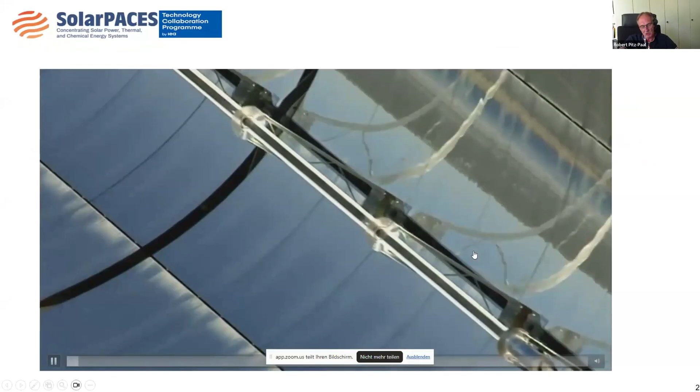Okay, thank you very much. And I also try to share my screen. Together with my colleague Benedikt Kölsch, I have actually the pleasure to chair this year's conference, the SolarPACES conference taking place in Bad Neuenahr. And it's actually the 32nd edition of this conference. And before I go into some of the details, let me make sure that you're all aware of concentrating solar technology. So this is a very brief animation video that shows you the principle.

When you concentrate sunlight, in this case on a parabolic trough collector, you are able to achieve very high temperatures, in this case like 400 degrees centigrade. This energy can be used, for example, to generate steam, and this steam can then be used on the one hand side for process heat application, but also, as shown in this video here, for the generation of electricity.

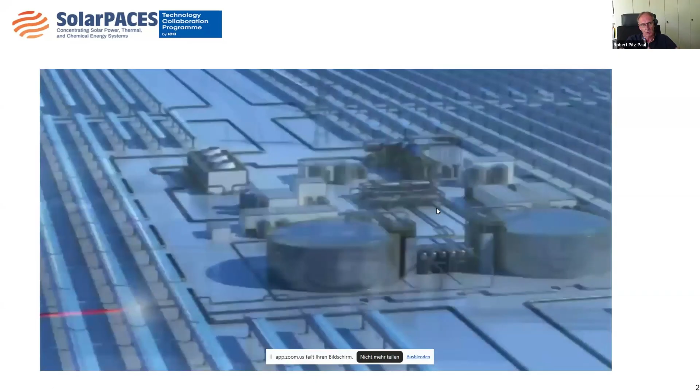This is actually a large scale application, so you typically do it in many megawatts. And one nice thing is also the energy can be stored as thermal energy very effectively and easily, typically in a molten salt, and can then be used to continue the operation during nighttime or during periods with clouds.

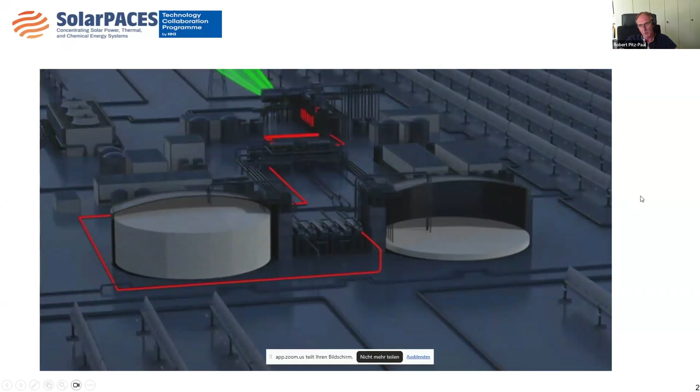So just to make sure we are all talking about the same topic and you are aware, SolarPACES is the implementing agreement, the technology collaboration program that is actually working on this kind of technology. So our vision is, of course, linked to this concentrating solar technology. We want that this becomes an option to significantly deliver clean, sustainable energy worldwide.

And as an international association, our mission is to facilitate the technology development, the market deployment, and energy partnerships by providing leadership as an international network of independent experts.

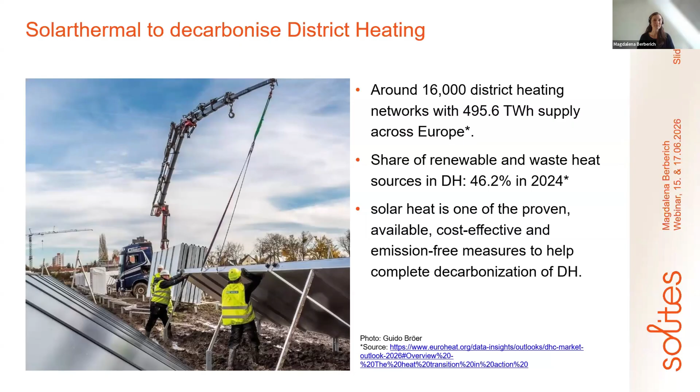Now the share of renewables and waste heat in 2024 was 46% already. And of course, we need to go further here. And solar heat can be one part of the solution. It's one of the proven technologies. It's available everywhere, cost effective and emission free. And so we are very convinced that it can play an active role here in the decarbonization of district heating.

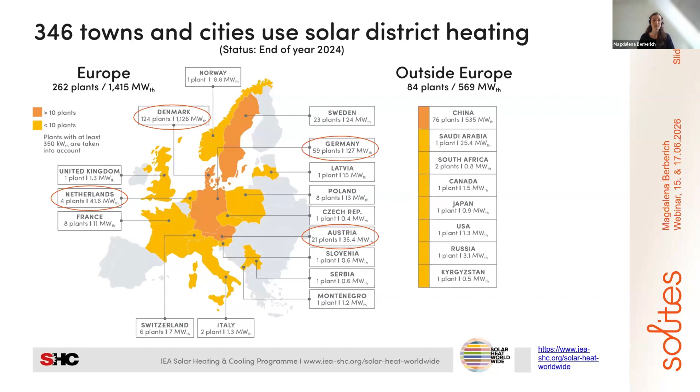And the good news is around Europe, there are a lot of towns and cities already using solar district heating. Here, for example, in Denmark, there's a large share of solar district heating. In the Netherlands, in Germany, and in Austria. These are the markets with the highest numbers of plants or installed capacity. And there are newcomers. There are other countries also installing new plants. So there's a lot of development here.

We take a deeper look into Germany. There we also have a lot of installed plants, now 241,000 square meters and 159 megawatts installed in 71 systems. These are numbers from end of 2025, so there may be some changes now. In 2025, we had 10 new systems. There's good development, especially last year. There were a lot of square meters newly installed.

And we know from the market that there are ongoing realizations. So plants that are in a very concrete planning phase, so that they will be commissioned or installed in the next months or years. And here it's also 10 systems with 132,000 square meters. So we know that the plants get bigger, so more collector area, more square meters are installed per plant, and the plants are very different.

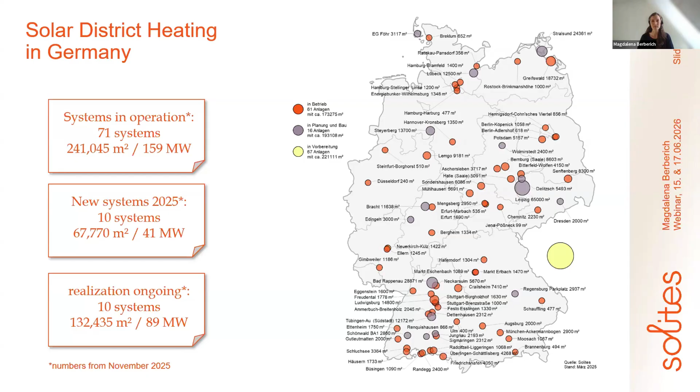So we have bioenergy villages, we have plants in towns, in the district heating networks of cities. And so we have very different structures in the installed plants. For example, here in the south of Germany, near Stuttgart, there is one plant in Tübingen, which went into operation last year.

It was a special thing with this plant that it was installed on a drinking water protection area. In the beginning, everybody said it's not possible, but then it was possible with a lot of communication with the local authorities to convince them that it's not harmful to the drinking water, that it's okay to install the plant. And in the end, it was possible.

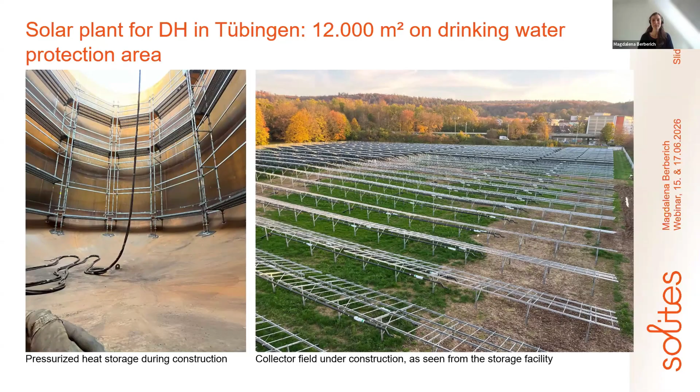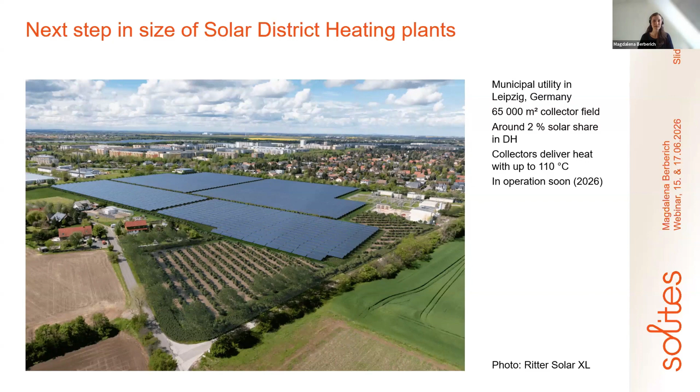And this is very important to know that, of course, solar thermal can be one part of the solution, together with other renewable energies and with other technologies. So it's everywhere important to take location-based decisions and not to say it's one system everywhere. This will not be possible.

But we need to see the whole system, to see that solar thermal is one part, that there are other technologies which need to be considered, that a whole system is responsible for the heat supply and not only one technology. And thermal energy storages are also a very important part of the systems to manage the heat supply and the different technologies.

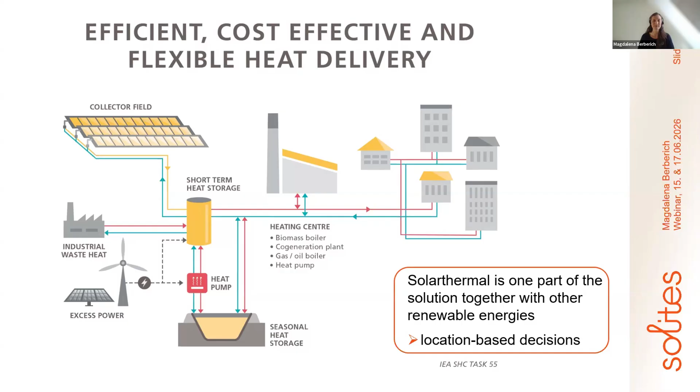Coming to the market and what is necessary to decarbonize district heating in Germany. Here is a forecast of how the heat demand will develop in the next years until 2045, since climate-neutral Germany is decided for 2045. So district heating is expanding, that is expected, and the heat demand overall will increase by 50%.

And here for solar thermal, there's a calculation, a scenario that 4 terawatt hours per year can be part of the heat supply, part of the solution. This would mean that we need 10 million square meters of collector area in total to supply these 4 terawatt hours per year. Now, you saw it before, we have 241,000 square meters of collector area installed. So there's a lot to do in the market to prepare the share of solar heat in decarbonized Germany in 2045.

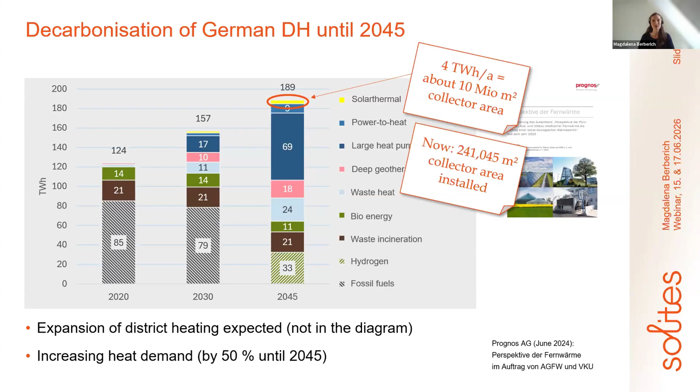And in 2023, there's also a problem with the building permits. It took a long time in 2023 and still takes a long time to get building permits, of course depending on the local situation. And this can also be part of why it takes long to install plants and for the market to increase. So this is very important to consider on the policy side, to not hinder the market on new installations.

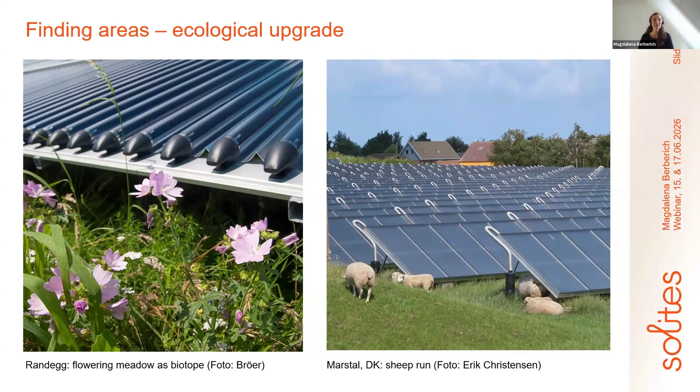Here the biodiversity increases over the years the solar thermal plant is installed, and some of the plants, especially in Denmark, also have sheep on the area. So this is also a possibility.

A short summary of what the success factors are from our point of view in Germany. Local heat planning is one important part. It's mandatory in Germany since 2023. So it's important for the communities to define which areas will be district heating and which areas in the city are for single house solutions.

And also the National Building Act, or National Law Building Energy Act. It means that new heating systems in houses need to reach a certain amount of renewable energy, or they need to be connected to district heating. And district heating systems have to make a transformation plan for total decarbonization until 2045. The first part is currently in discussion to update it.

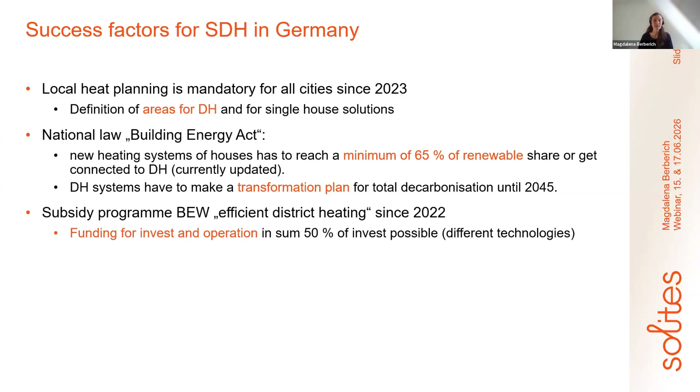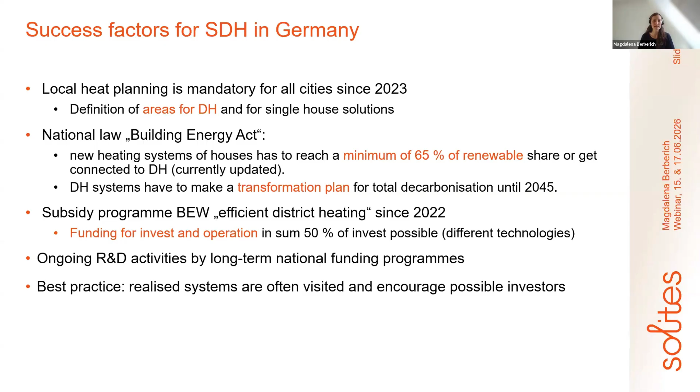And there are subsidy programs like BEW, and there's funding for investment and for operation. And in sum, it's possible to reach 50% of the investment. And the funding is for different technologies, so it's not only solar thermal, but also heat pumps, for example. R&D activities are important to push the development and the market, and best practice, of course, where people can see how it works in other places, and know-how transfer like today.

So I look at the time, maybe just 1 minute more. I want to tell you also that we were active in IEA SHC Task 68, where the topic was large-scale solar district heating, in different technology combinations and in different sub-activities. And results were, for example, a technology position paper where everything is summarized from the results. There are a lot of technical reports. There are webinars and videos, so you can have a look, and I'm sure there's something new for you included, where you can learn something about the technology and the systems.

New within IEA SHC are the collaboration groups, Lucio told already, and I just want to add that we have a joint meeting at EuroSun. There will be a session to introduce the collaboration groups. So I'm very much looking forward to seeing some of you there. And the registration for the collaboration groups will be available soon as well. So if you're interested, I'm happy to see your registration.

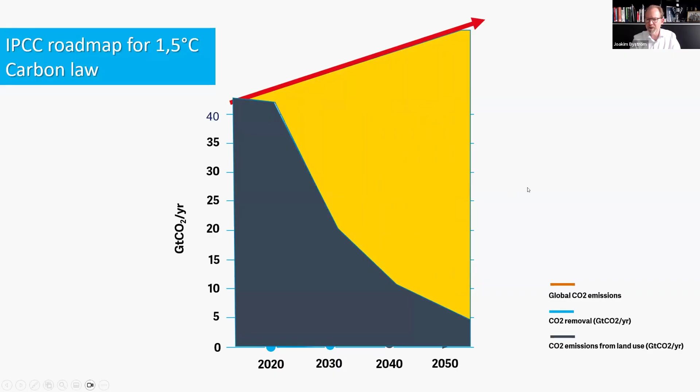But at the same time, we are going from being 8.3 billion people and 1 billion middle-class people to be 10 billion people and 4 billion middle-class people on Earth. So the global economy will grow 4 times by 2050. So at the same time as we need to cut down on the burning of fossil fuel, the energy consumption will continue to increase. And we get this huge gap between the way we got the energy before and the energy that we need for the future, that needs to be filled by renewable energy, and something with a little nuclear, but it will be just a small piece of this. So this is a huge challenge for all of us that work with energy, and especially working with heat.

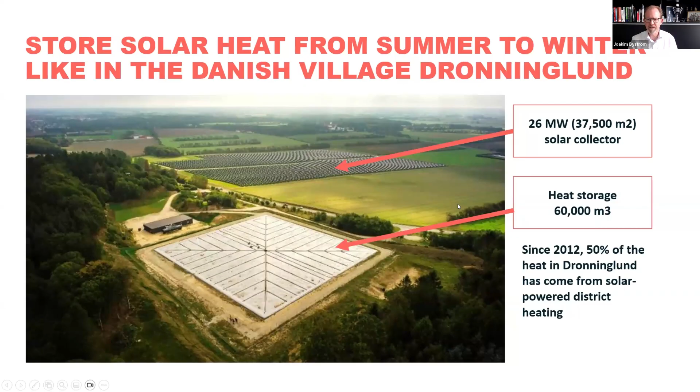And I think that storing heat from summer to winter is one of the keys: using solar thermal, like here in Dronninglund, collecting it with solar collectors and storing it in, for example, pit storage or borehole storage to winter. And here you can see how simple it is. You have the solar collectors, you dig a big hole, you put a liner inside, you fill it up with hot water in summer, and you can use the hot water all year round. And unfortunately, this technology has been under the radar, I would say. The EU Commission and other European bodies have not taken much notice of this technology.

But now with this crisis in the Strait of Hormuz, on the 22nd of April, the Commission published a number of actions. And one of those actions was actually to help develop public support schemes for large-scale solar thermal projects, and to see that solar thermal becomes one of the pillars in the transition away from fossil fuel and to a more resilient Europe.

And Absolicon, our part in this is working with large fields. And there has been another Scandinavian or Nordic company working with large-scale installations, Savo Solar. At Absolicon, we work with solar concentrators, and Savo Solar with flat plate collectors. We work more with industries, and Savo Solar works more with solar district heating. And we have now decided to join hands. We have bought Savo Solar, and we will work together as one company.

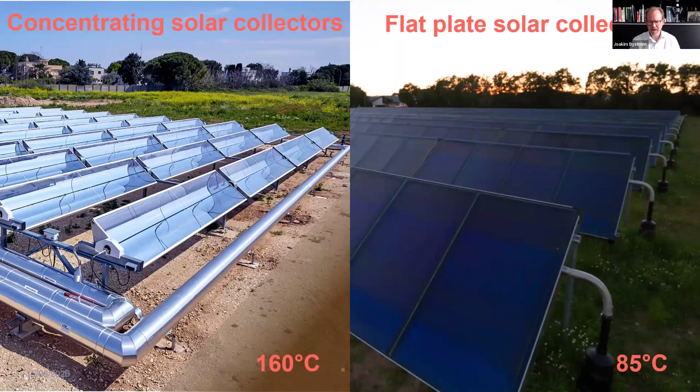And we do solar concentrators that you can see on the left side, producing up to 160 degrees, while Savosolar manufacture this fantastic large-scale solar thermal flat plate collector. The production has stopped now, but we own all the patents to restart the production. But we will also cooperate with other manufacturers of large flat plate collectors. So there are two very different principles.

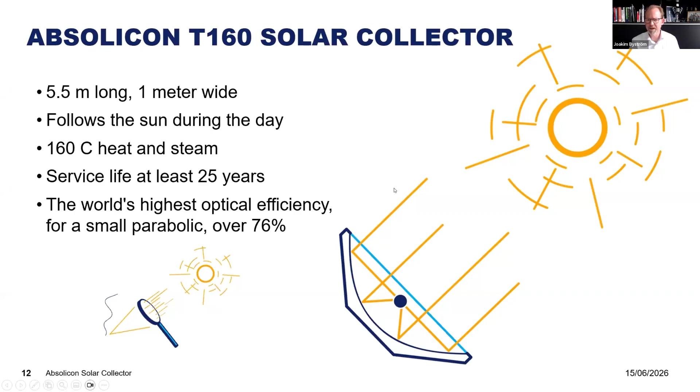The Absolicon concentrator, it's 5.5 meters long, 1 meter wide, and it focuses the light like a magnifying glass to produce high temperatures. And we have the world's highest optical efficiency for a small parabolic trough with over 76%. While the Savosolar collector is a traditional flat plate collector where the sun shines on the flat plate, but maybe not so traditional, because Savosolar had the idea of making a solid aluminum with channels inside that gave them the highest efficiency for a flat plate, non-evacuated.

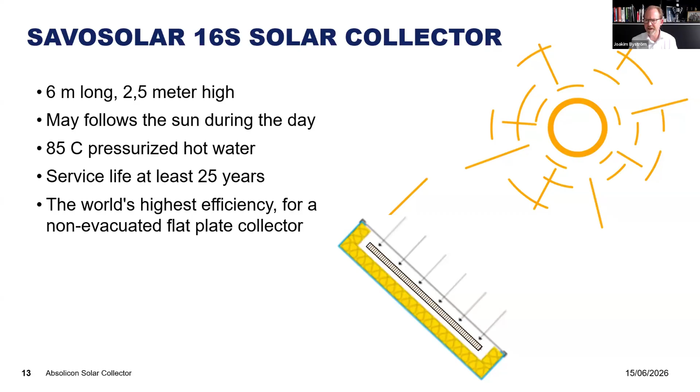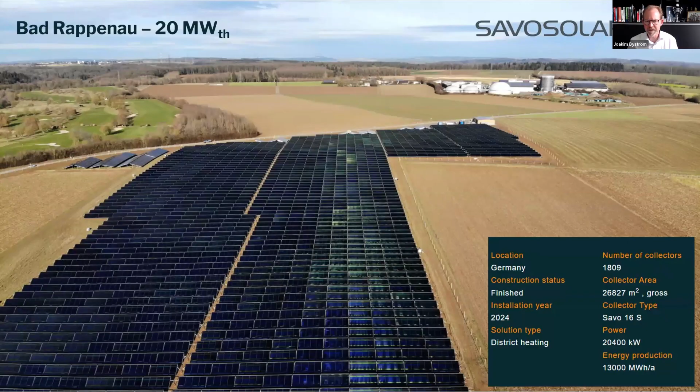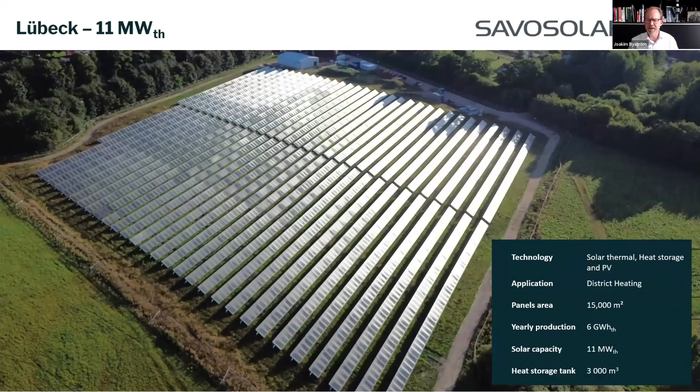So Absolicon and Savosolar, we have been in the solar district market. These are examples of installations that Savosolar has built in Europe, but there are over 20 of them. And those large installations, they work exactly as we heard, providing heat for the cities. And Savosolar installations, they work best at temperatures up to 80 degrees. But Absolicon also have built a few district heating connected installations, like this one on Högslätten in Sweden. And here we produce up to 110 degrees Celsius. It's very easy to get high temperatures with the concentrators.

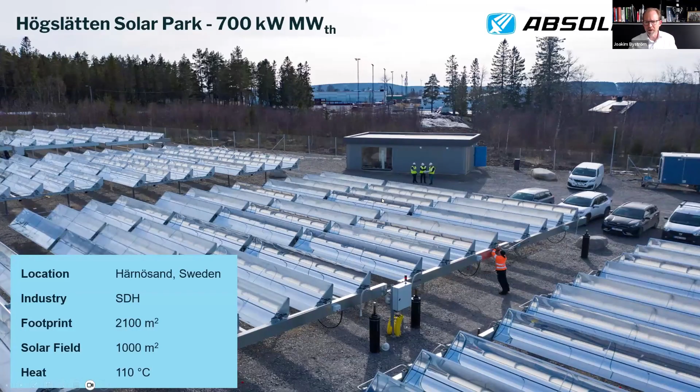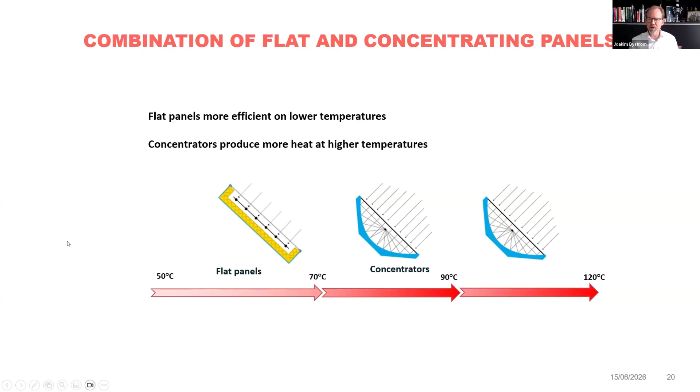And those two technologies can actually be combined. So you can have flat panels to take in the cold side in the district heating network and heat it up like from 50 to 70 with a flat plate, where they are very, very efficient. But when you get above 70 degrees, the flat plates lose some of their efficiency. And then you can instead run the hot water to a field of solar concentrators and push up the temperature further. And if you, like in Germany, often have quite high temperatures in the district heating networks, you can add more concentrators and push up the temperature even higher, up to 160 degrees if you would like to, which might be suitable if you want to store the heat in a pressurized hot water storage.

But recently we had a new law about recycling. So all the buildings in Sweden need to have a real recycling system of trash with 8 different fractions. And this has reduced the amount of fuel for the waste incineration systems to 25% of what it was previously. So now we are importing a lot of waste from, for example, Italy to run our waste incineration plants. So I think this idea that we would burn waste, it's actually something that will pass, because we will recycle both paper and plastic, and then there's nothing to burn. And we do biogas of the food waste.

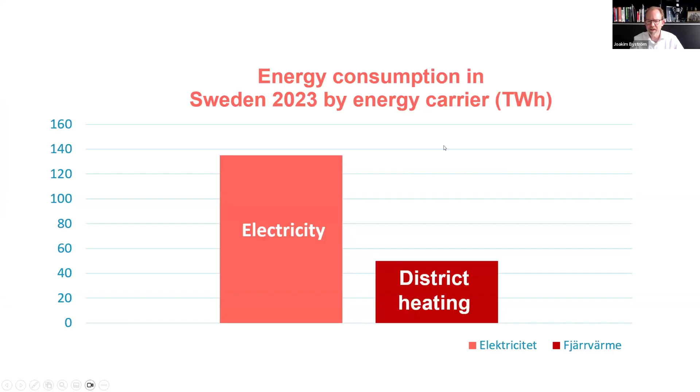And the district heating system in Sweden, it's huge. We do about 138 terawatt hours of electricity and about 50 terawatt hours of district heating. So it's really strange that no one talks about the district heating system in Sweden. And the typical district heating system in Sweden, for a small town like my hometown here in Härnösand, has many different energy sources. It has a wood chip boiler with a turbine for electricity generation. It uses waste heat from a local pellet factory. It had a pellet boiler for summer operation and peak load. It also has a 20 megawatt electric boiler, and they have small oil boilers out in the network for backup.

And the cheapest heat is produced when the large wood chip boiler is used. And that is in winter. But in summer, the heat load is not sufficient to operate the big wood chip boilers. Instead, they run the smaller pellet boiler. And that means that the heat is about double as expensive in summer as in winter. And this is the case in many of the biofuel powered district heating networks around Europe, that the heat is most expensive in summer. So a very logical thing to do when you do cost reduction is to stop burning in summer and use solar heat in summer, and then you can burn wood chip in winter.

But this message is really tricky. When we come to people and talk about solar thermal, they immediately think, oh yes, we want solar thermal in winter. That's the normal reaction. And then, no, you should use solar thermal in summer when the heat is most expensive from your plant. And I think slowly we are getting people to pick up on that one.

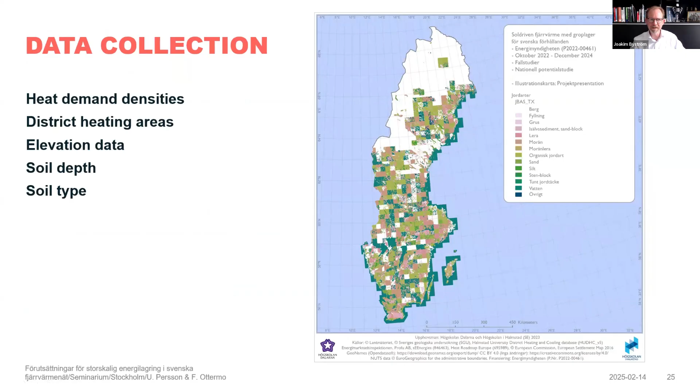We are super interested in those pit storages, and we have done a real mapping of Sweden with where we could build pit storages based on soil depth, soil type, elevation data, and district heating areas. So for every Swedish city, we have done this kind of area maps where we mark up in yellow the areas where they're suitable to build solar thermal and pit storages.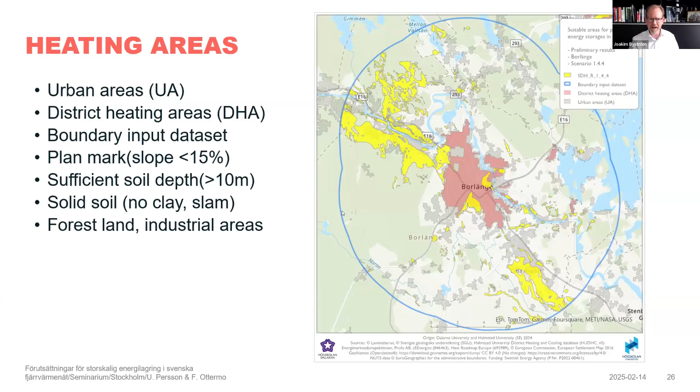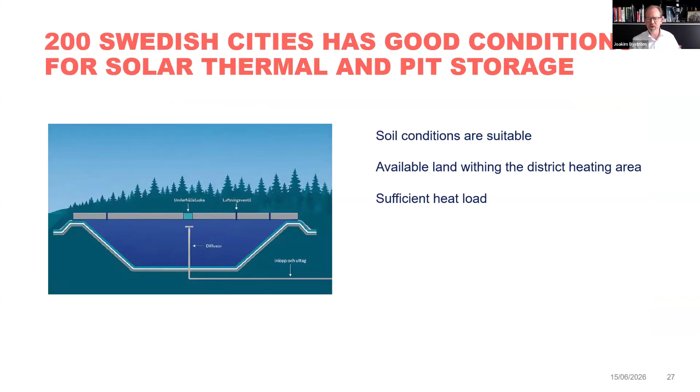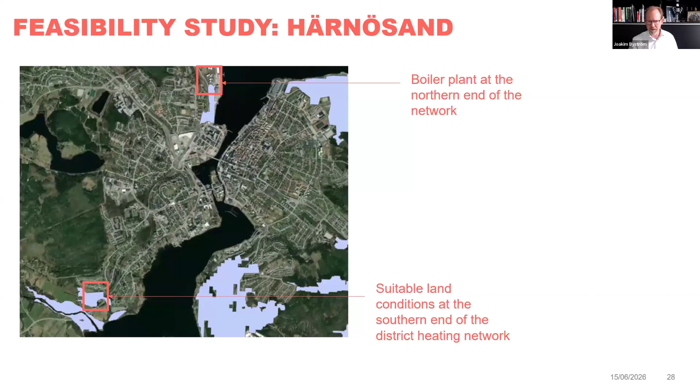And what we found was that about half of all the Swedish district heating networks, 200 Swedish cities, have good conditions for solar thermal and pit storage based on soil conditions, available land, and sufficient heat load. And for example, in a feasibility study here in Härnösand, the bluish areas here is where there is good conditions for a pit storage. And then we connect it to the grid, of course.

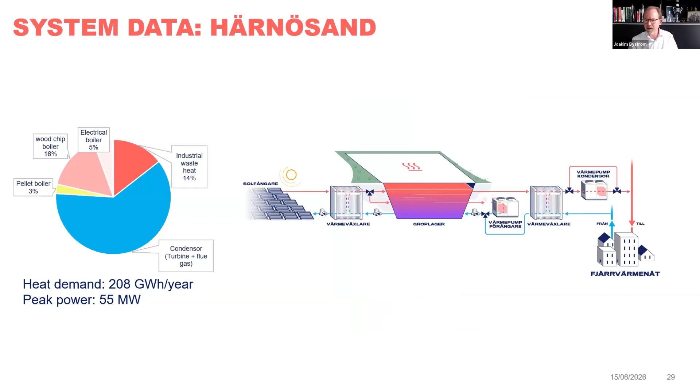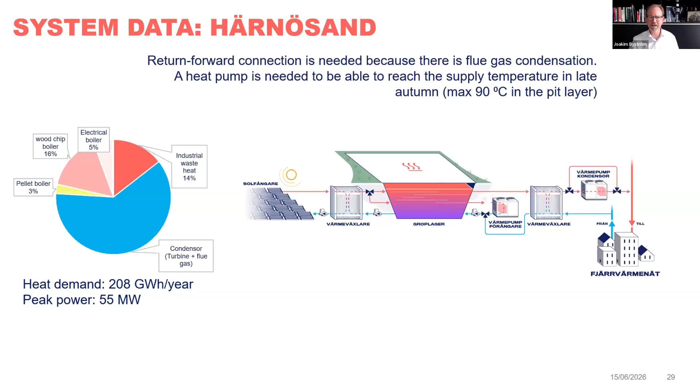And in Sweden, in Härnösand, you see, we have different energy sources. And we propose then a system with solar thermal and a pit storage combined with a heat pump to empty the storage fully. And here we need to put the heat on the return forward as we have flue gas condensations. We cannot just put it into the return line. And the result is that we get this kind of combination of different energy sources.

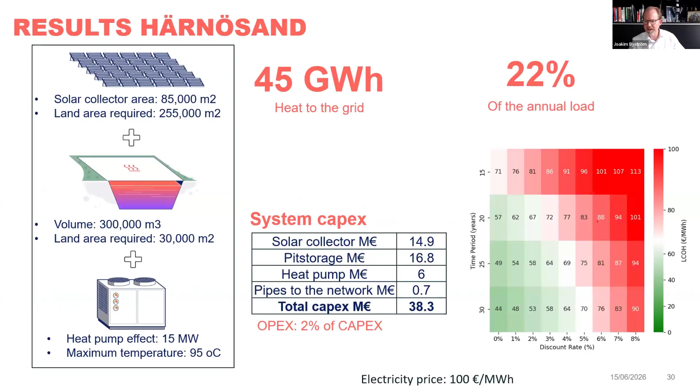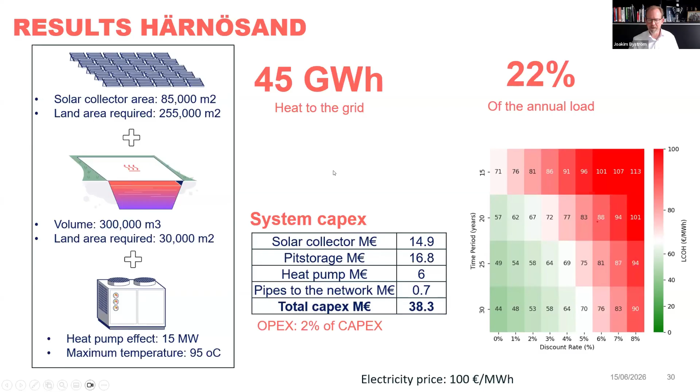And based on what discount rate you have, what interest you pay to the bank, and how long time you expect the operation to be going, you get different levelized cost of heat. So you see with like 3% discount rate and 30-year, you get about 58 euro per megawatt hour. But this is with today's price and without any subsidy. So I think there's a lot of price reduction to win here.

And that I think is one of the key questions, how to make solar thermal even more profitable for the end users. And of course, more installations, larger installations, more competition is what will bring the cost down. And we saw this very clearly in Denmark, where we for a few years had a working solar thermal market. And continued R&D is also part, but I think this is also run by having a real market. Because a real market, a mature market, results in this economy of scale with improved subcontractor networks and logistics. And that is what, like the invisible hand, pushed down the price of the installations.

And for this, we have the help now of the idea of the European Commission that they want to push large-scale solar thermal projects. And the important thing is that the support and the idea of the countries is that we should have the same kind of development that wind and PV had. That not just a small subsidy that makes a few installations, but the idea, how many installations do we need to get a mature market where the prices are pushed down so that it can outcompete the fossil fuel.

And this can be calculated with data from IRENA, for example, that shows that the price decreases with every new volume on the market. And when you know how big volume you want on the market to have a working market, you can then dimension the support schemes to create that kind of market, just like what happened with the PV market. Because the PV is still a very complicated technology, while solar thermal is basically steel and glass and some aluminum and some copper, and then we can produce all the heat that the city needs. And we can store the heat from summer to winter as well. So I think that was my last one.